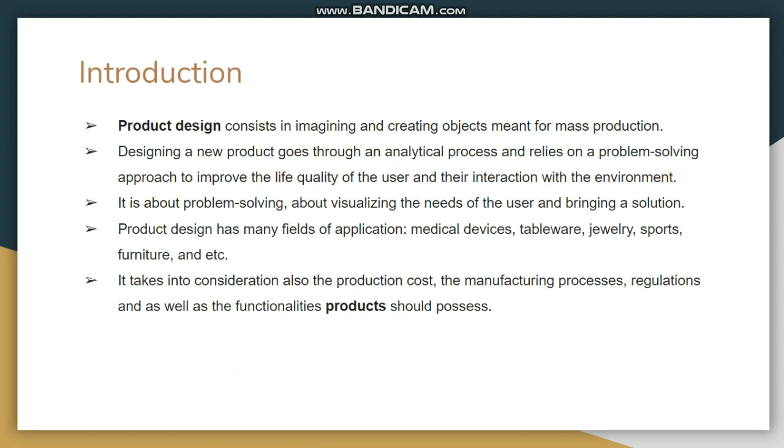Next, why is chemical product design important? Chemical product design can be seen as the operational and concrete task of converting consumer needs and new technologies into new chemical products.

Second, to illustrate process analysis with examples of chemical products. Third, a holistic approach to design and development of new chemical products. Next, to express and characterize the quality of the product from the customer's perspective.

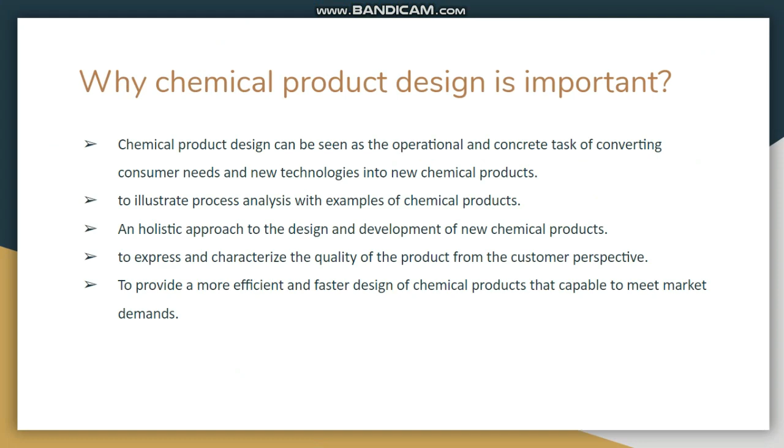And for the last one, to provide a more efficient and faster design of chemical products that is capable of meeting market demand.

Next, I will proceed with the procedure proposed by the authors for designing a chemical product. Number one is broadening of the body of knowledge associated with the discipline. Second, adoption of a multifaceted approach to products and processes. Then, the emergence of chemical product engineering, the need for moving the design of chemical product.

More systematic approaches have to be adopted in order to guarantee competitiveness. Then, determination of unit operations and transport phenomena, identifying chemical product engineering, the chemical product pyramid, and integration of chemical product and process design.

Chemical product design can be seen as the operational and concrete task of converting consumer needs and new technologies into new chemical products, and this corresponds to the chemical product engineering discipline.

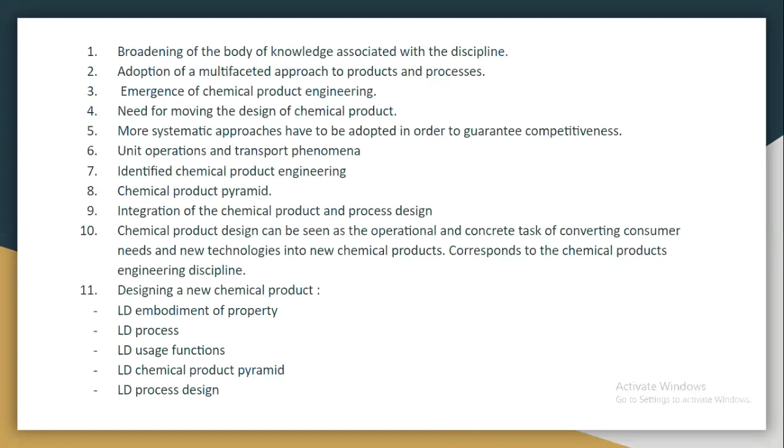Designing a new chemical product involves: the embodiment of property, the process, the usage/function, the chemical product pyramid, and process design.

A chemical product can be a multifunctional product, a product, an engineered product, a dispersed system, a chemical-based consumer product, or a formulated product.

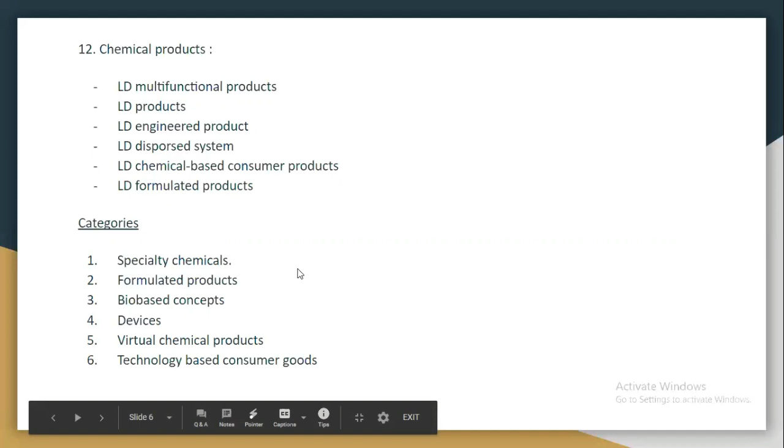For categories, we have specialty chemicals, formulated products, bio-based concepts, devices, virtual chemical products, and technology-based consumer goods. Number 13 is for mechanical, electrical, computer, and biomedical engineering.

So we need to identify needs, generate the product idea, select the most promising product idea, and then develop a process to manufacture the desired product.

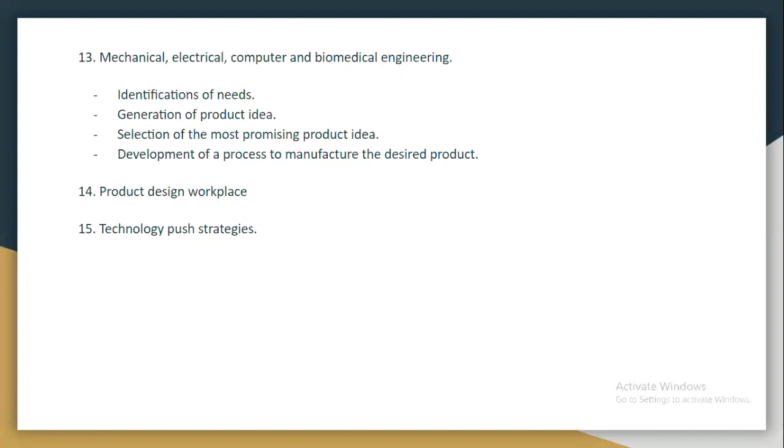The next point is the product design workplace, and the last one is technology push strategies.

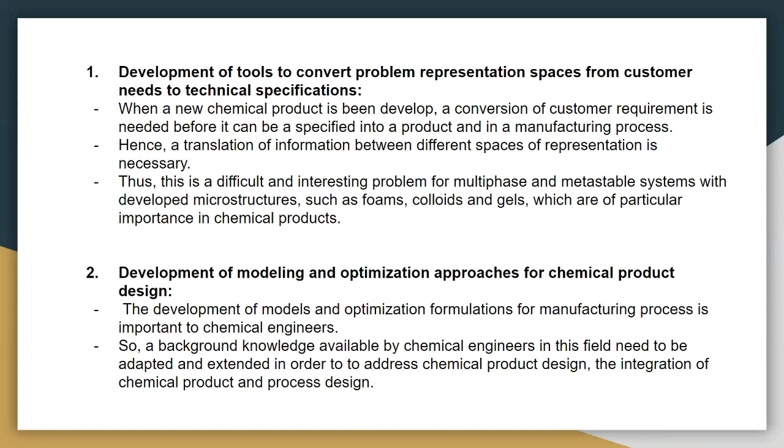Secondly, the limitation in the development of modeling and optimization approaches for chemical product design. The development of models and optimization formulations for manufacturing processes is important to chemical engineers. Background knowledge available to a chemical engineer in this field needs to be adapted and extended in order to address chemical product design, the integration of chemical product and process design.

Thirdly, the limitation in the development of predictive capabilities for physical properties. There is a serious gap between current thermodynamic modeling capabilities to describe commodity chemicals and the understanding of more complex chemical products such as formulated products. Thus, thermodynamics is a promising research area in the context of chemical product engineering.

And lastly, the limitation in the development of systematic approaches supporting chemical product design. This means that the chemical process industry has been releasing successful chemical products for a long time, but some traditional products have been developed through costly and time-consuming trial and error design procedures.

So, the development of a systematic and integrated framework, based on identified tools, methodologies, workflow, and data flow for the interrelated activities involved in the design of new products, has been recognized as one of the limitation challenges in this procedure. That's all from me.

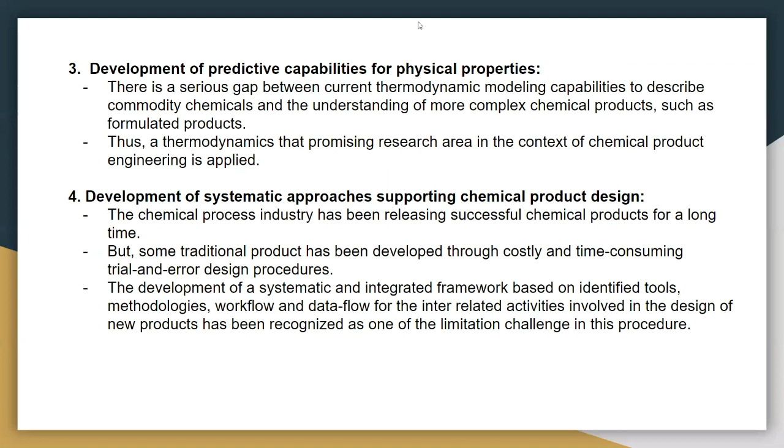Assalamualaikum warahmatullahi wabarakatuh. As for the conclusion, the articles conclude that systematic design of chemical products is needed for each company to deal with demands and market. This systematic design helps each company deal with the demanding markets that overflow in the company.

Secondly, science and art are being used when creating a new chemical product, based on the definition of chemical product engineering. Chemical product engineering insists that science and art are being used when creating new chemical products. This is due to the demanding market of the company.

A structure for organizing the emerging area is proposed, and the demanding market should be handled smoothly. If these three are present in the company, the demanding market can only be handled smoothly and softly, like crystal clear: systematic design of chemical product, science and art being used, and a structure for organizing the emerging area.

The fourth conclusion is that chemical product design and chemical product engineering are not seen as similar actions. In the article, the author only mentions these two things: chemical product design and chemical product engineering.